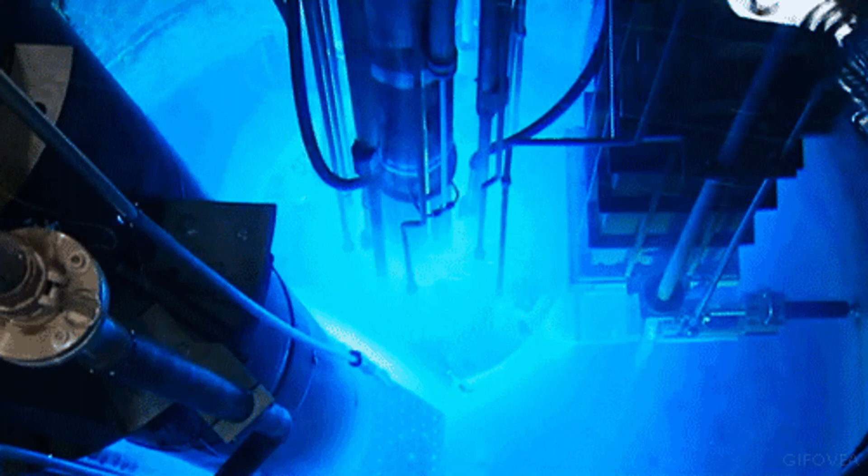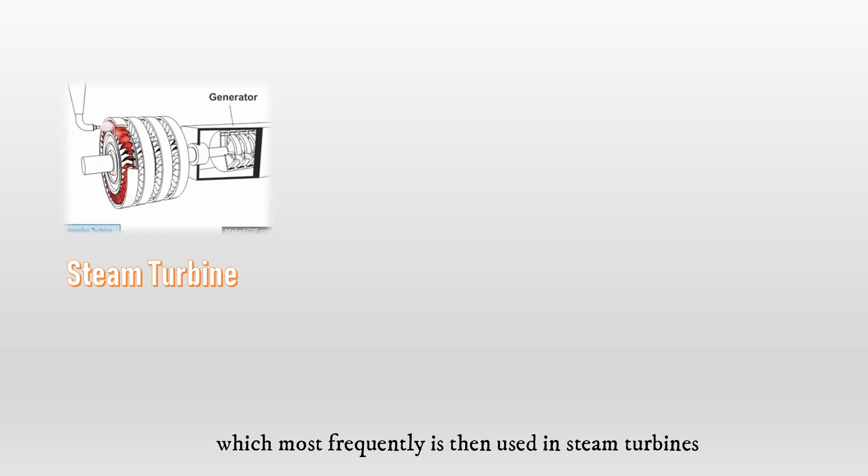Nuclear power is the use of nuclear reactions that release nuclear energy to generate heat, which most frequently is then used in steam turbines to produce electricity in a nuclear power plant. Nuclear power can be obtained from nuclear fission, nuclear decay, and nuclear fusion reactions.

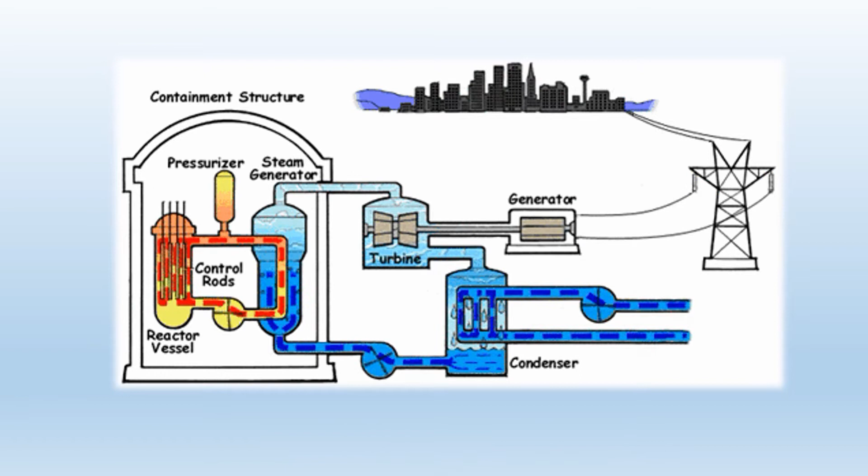A nuclear power plant is a thermal power station in which the heat source is a nuclear reactor. As is typical of thermal power stations, heat is used to generate steam that drives a steam turbine connected to a generator that produces electricity.

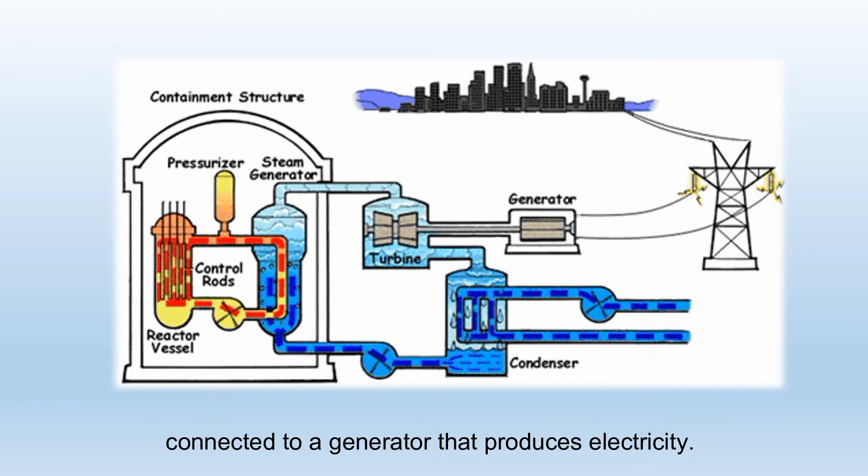What is Generation IV reactor?

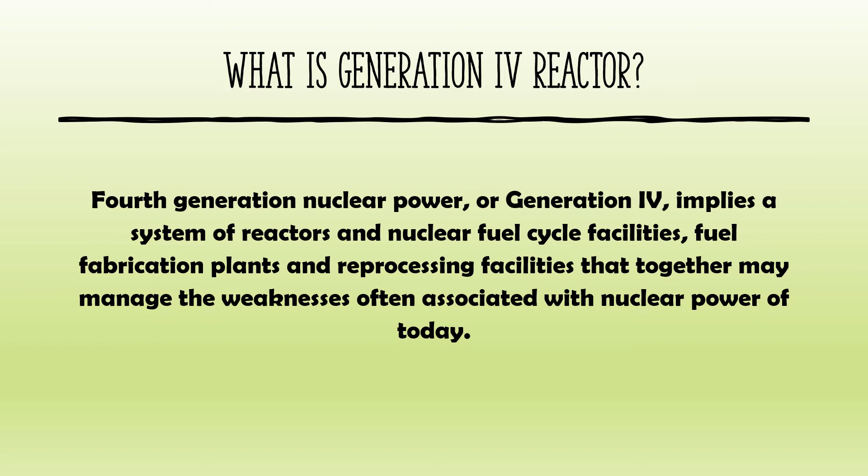Fourth generation nuclear power, or Generation 4, implies a system of reactors and nuclear fuel cycle facilities, fuel fabrication plants and reprocessing facilities that together may manage the weaknesses often associated with nuclear power of today. Generation 4 nuclear energy systems are deployable no later than 2030 and offer significant advances in sustainability, safety, reliability, and economics.

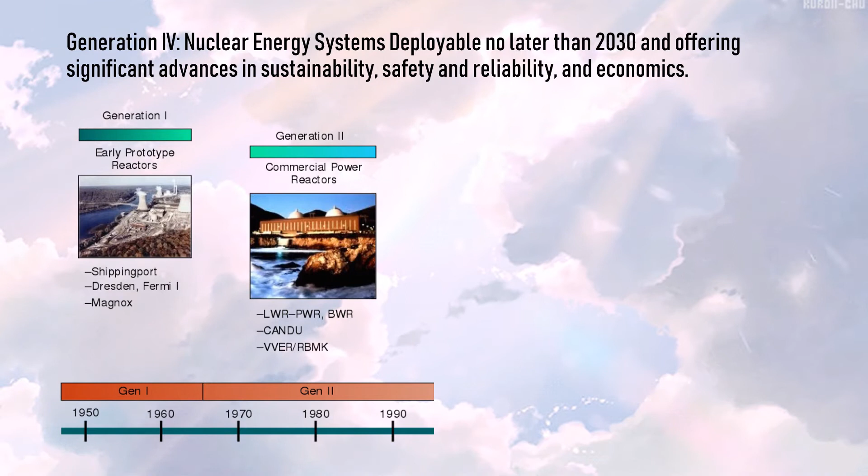For the first generation, it is the early prototype reactors, which is between 1950 to 1960. The second generation is the commercial power reactors, between 1970 to 1990. Generation 3 is the advanced LWRs, which is the continuation of the second generation until 2010.

Finally, the advancement in the nuclear reactor is Generation 3 Plus and Generation 4, which started from 2010 and is still continuing until now. This advancement is still in research, and it is expected to develop good results and be useful for the progress of the world in the future.

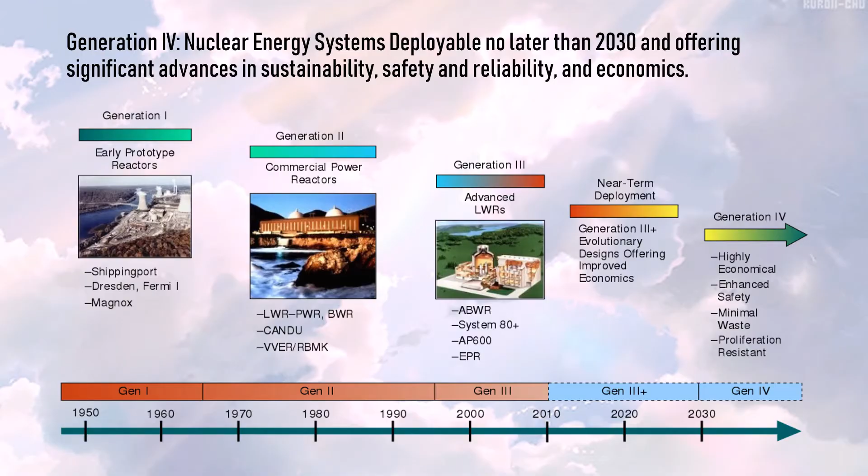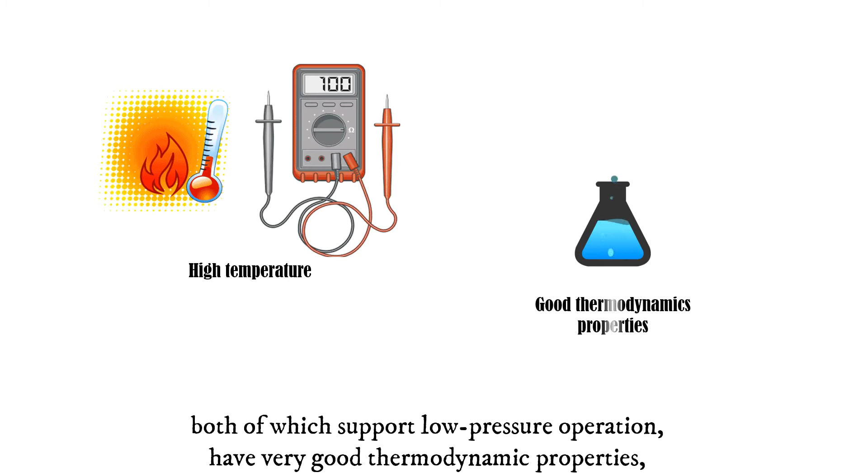The lead-cooled fast reactors, LFRs, feature a fast neutron spectrum, high-temperature operation, and cooling by either molten lead or lead-bismuth eutectic, LBE, both of which support low-pressure operation, have very good thermodynamic properties, and are relatively inert with regard to interaction with air or water.

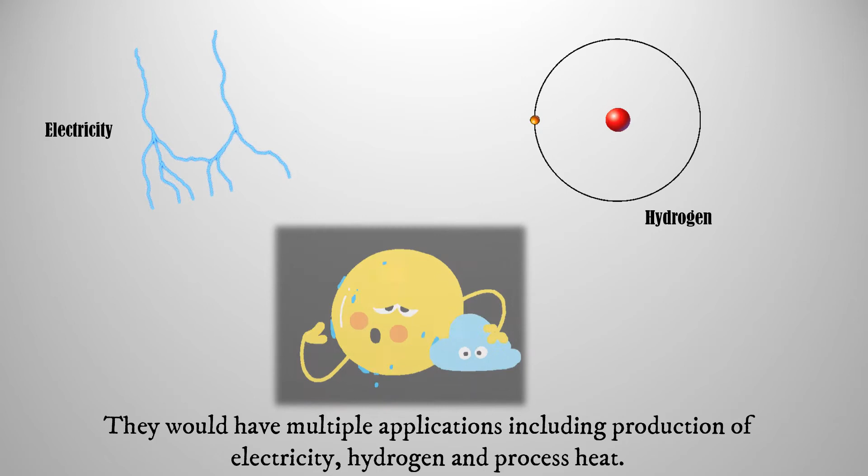They would have multiple applications, including production of electricity, hydrogen, and process heat. System concepts represented in plans of the Generation 4 International Forum, GIF, System Research Plan, SRP,

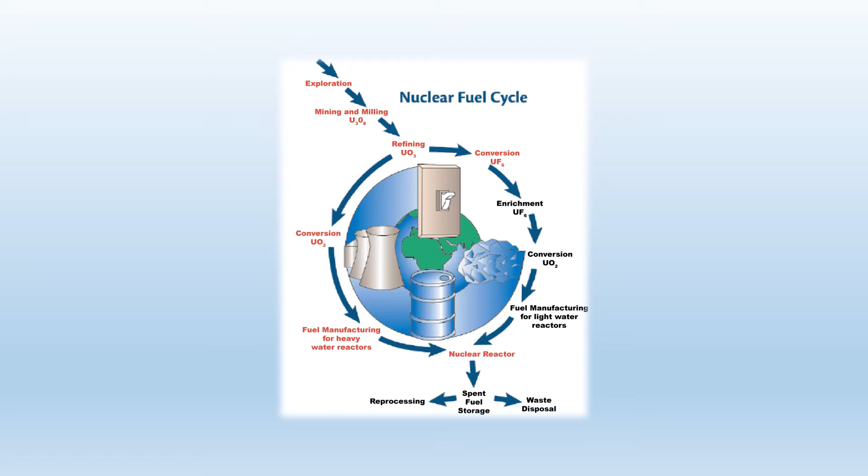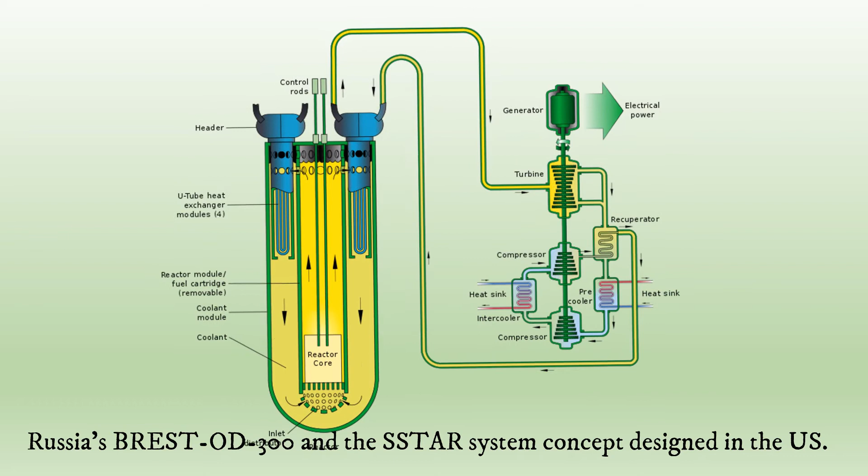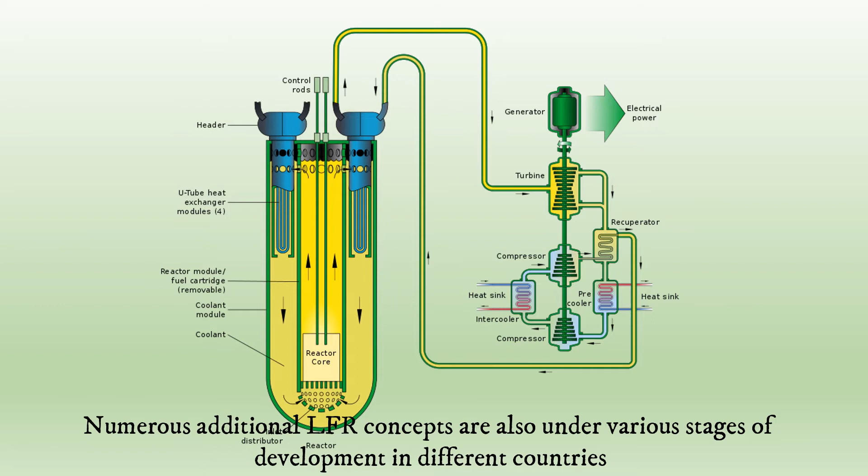are based on Europe's ELFR lead-cooled system, Russia's BREST-OD-300, and the SSTAR system concept designed in the US. Numerous additional LFR concepts are also under various stages of development in different countries including China, Russia, the USA, Sweden, Korea, and Japan.

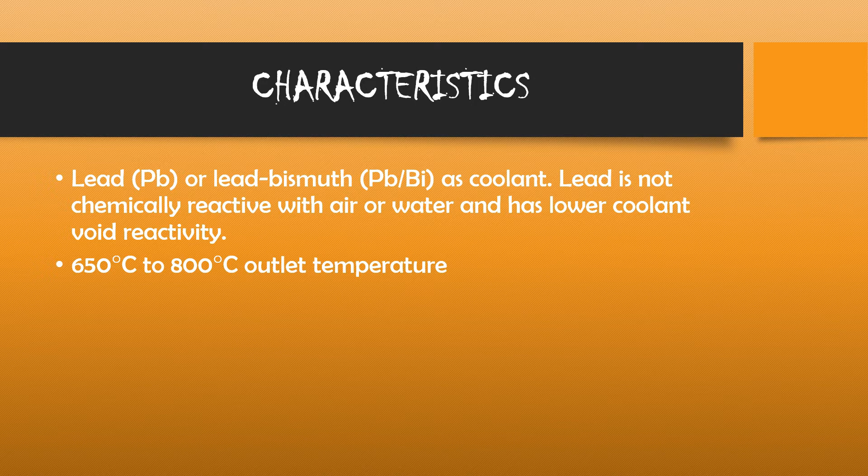Lead, Pb, or lead-bismuth, PbBi, as coolant. Lead is not chemically reactive with air or water and has lower coolant void reactivity. Outlet temperature of 650 to 800 degrees Celsius. Small transportable system: 50 to 150 megawatt electrical. Larger station: 300 to 1200 megawatt electrical.

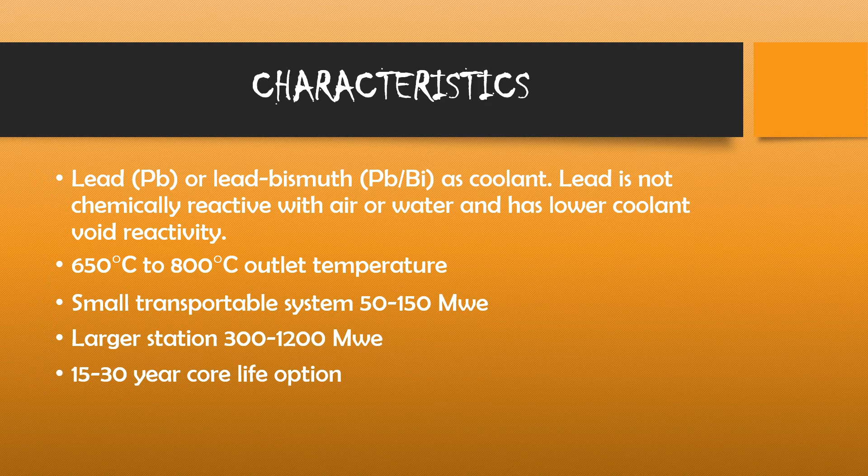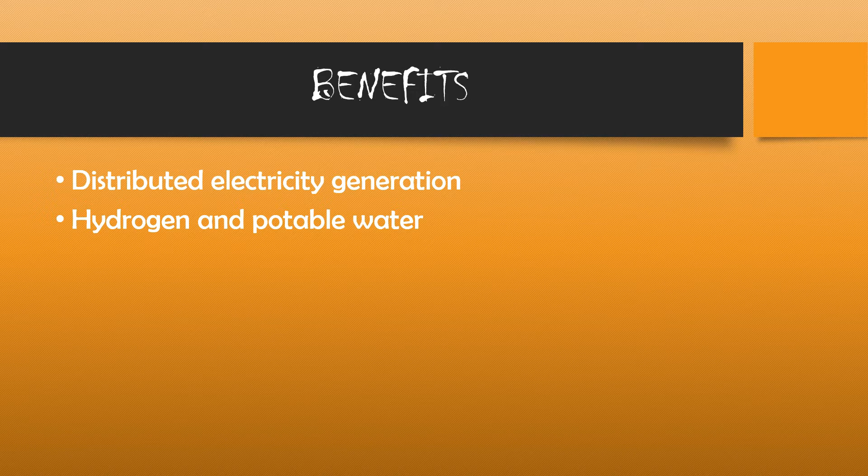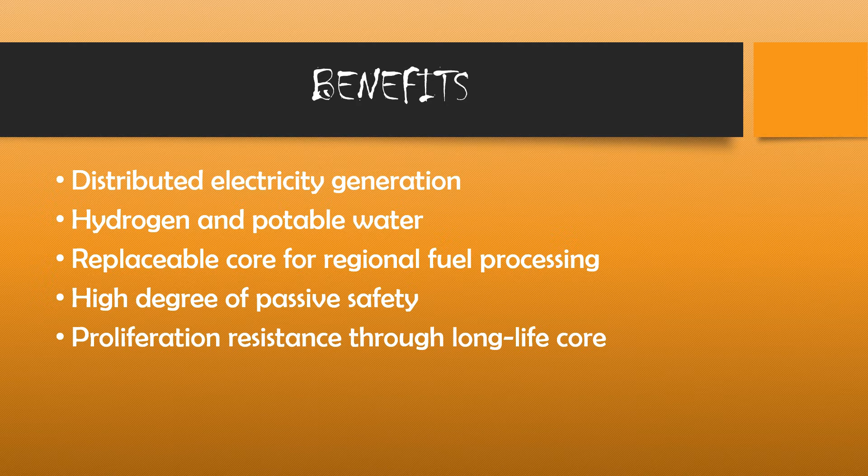15 to 30 year core life option. Distributed electricity generation. Hydrogen and potable water. Replaceable core for regional fuel processing. High degree of passive safety. Proliferation resistance through long-life core.

The use of lead as a coolant offers several important advantages in this regard. In an interesting recent analysis, Toshinsky et al., 2011, considered the question of stored energy in various types of reactor coolants. This analysis highlights several important advantages of lead coolants with respect to the availability of energy, whether thermal, pressure-related, or chemical, to exacerbate accident conditions, whether initiated by natural phenomena or not.

As low-pressure coolants with relative chemical inertness, lead has innate characteristics that enable a high level of passive safety and suggest more benign end states in the case of unforeseen accident conditions.

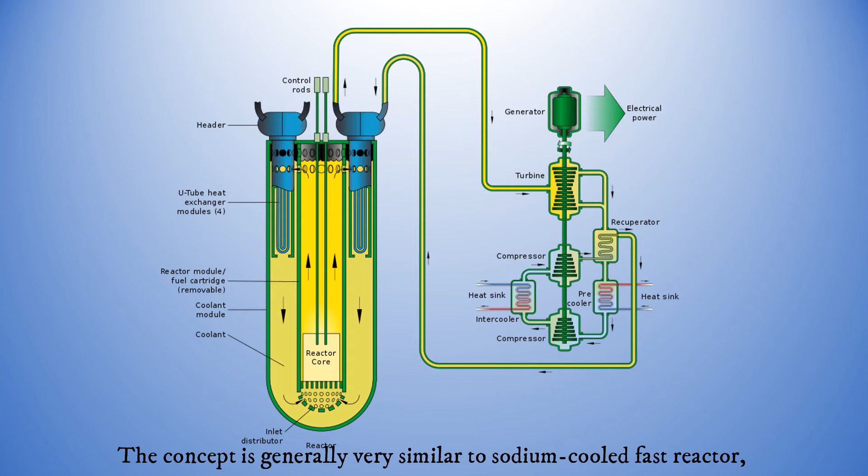The concept is generally very similar to sodium-cooled fast reactors, and most liquid metal reactors have used sodium instead of lead. Similarities between thermal reactor and fast reactor: both are nuclear fission reactors, not nuclear fusion reactors. Enrichment of natural uranium with uranium-235 isotopes is required in both types of reactors, however the percentage of such enrichment varies widely.

PHWR can be operated at natural percentage of uranium-235. Chain reaction is very much desired to continue heat generation irrespective of the type of reactor. Irrespective of reactor type, uranium dioxide, UO2, in the form of rod or pellet, is commonly used as nuclear fuel.

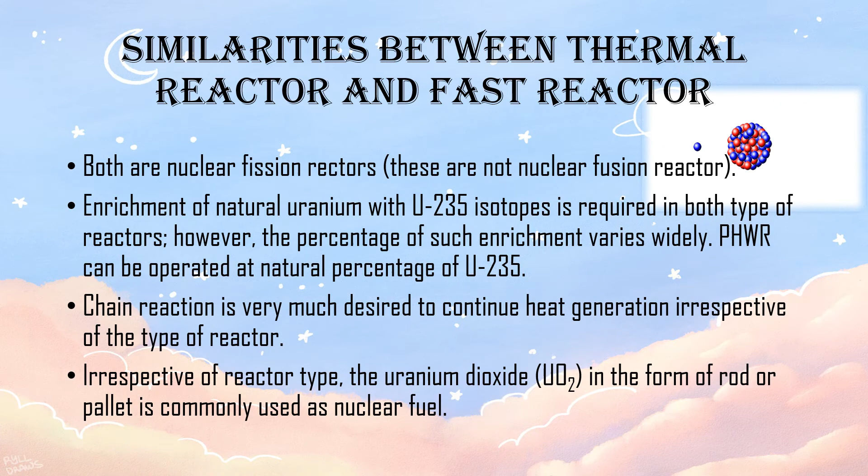Differences between thermal reactor and fast reactor: in thermal reactors, the fission chain reaction is sustained by thermal neutrons, while in fast reactors, the chain reaction is sustained by fast neutrons.

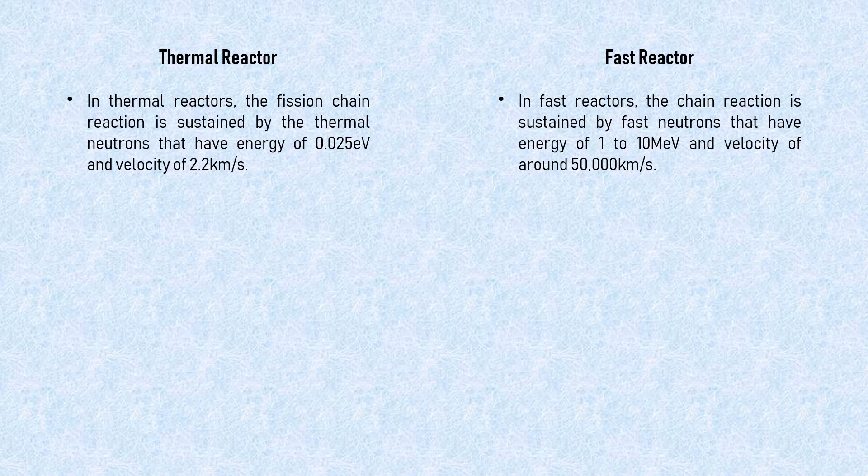Moderation is required to slow down the prompt neutrons produced in one fission reaction, in order to make such neutrons suitable for further fission. No such moderation is required in fast reactors, as fission is sustained by fast neutrons. Based on the design, thermal reactors utilize either light water, heavy water, or carbon dioxide as coolant, while fast reactors utilize liquid metal, such as liquid sodium or liquid lead, as coolant.

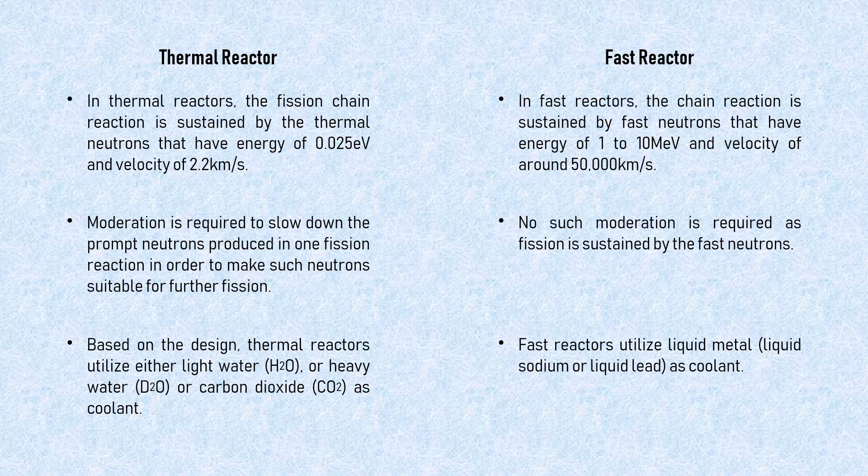Thermal reactors require low-enriched fuel. Typically, light water-based reactors and gas-cooled reactors require 3 to 5% enrichment, while heavy water-based reactors require no enrichment, meaning natural uranium can be used as fuel. Fast reactors require comparatively high enrichment to increase chances of fission by fast neutrons. Fast reactor fuels are usually 15 to 20% enriched.

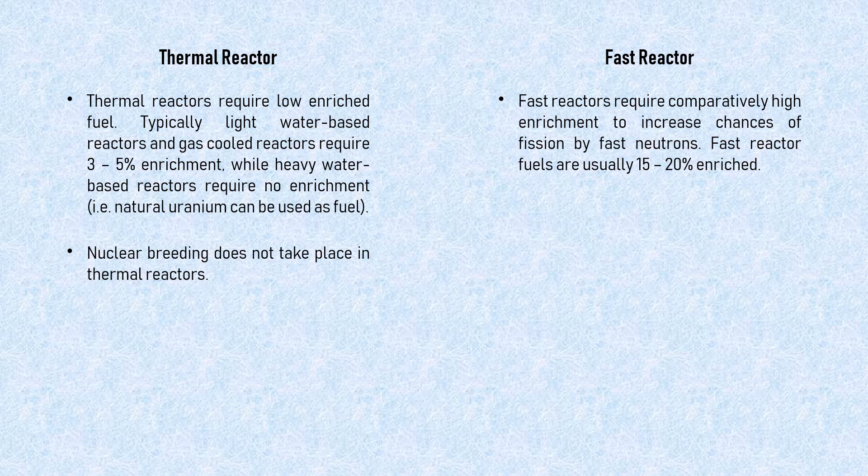Nuclear breeding does not take place in thermal reactors, but it occurs in fast reactors. Finally, thermal reactors generate large radioactive waste, while fast reactors help reduce radioactive waste by continuously disintegrating heavier isotopes.

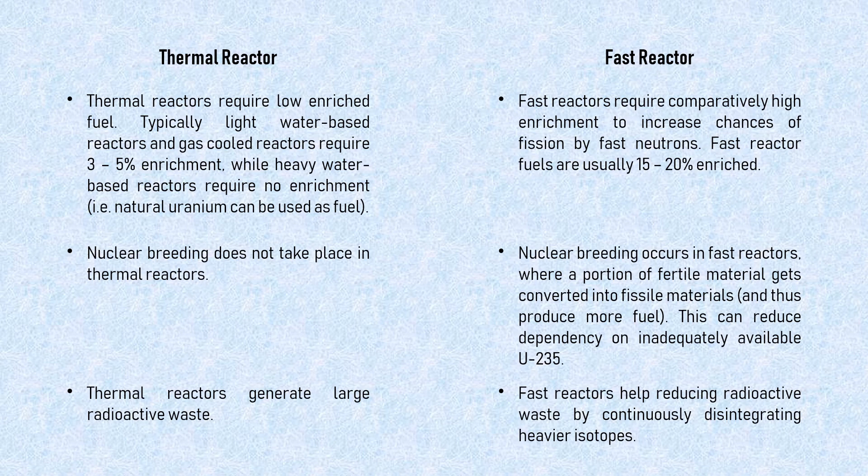The LFR is an advanced Gen 4 reactor type that offers significant advantages in achieving the goals set by GIF 10 years ago. Among the 6 reactor types considered promising by the GIF, the LFR may well offer the best combination of characteristics and advantages. The events at Fukushima Daiichi have increased international attention to the need for advanced reactors to be resilient in the face of unforeseen and/or severe accident conditions.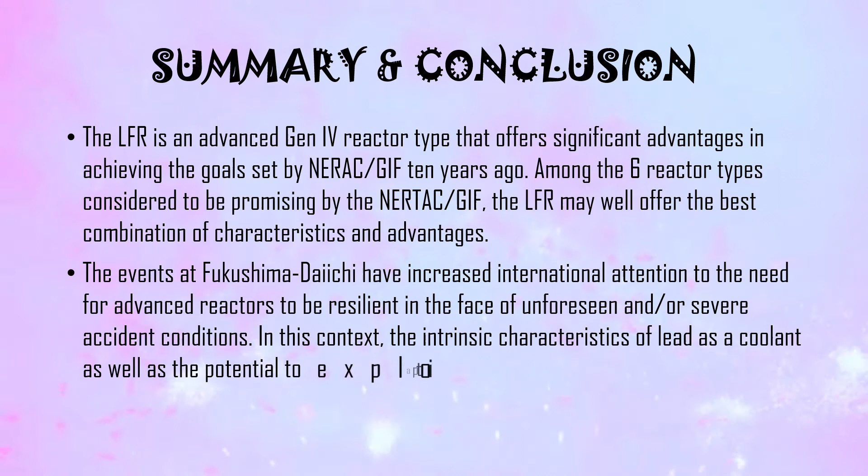In this context, the intrinsic characteristics of lead as a coolant, as well as the potential to exploit passively operated heat removal from lead-cooled systems, lead to particular advantages of the LFR as an advanced reactor technology to meet present and future needs.